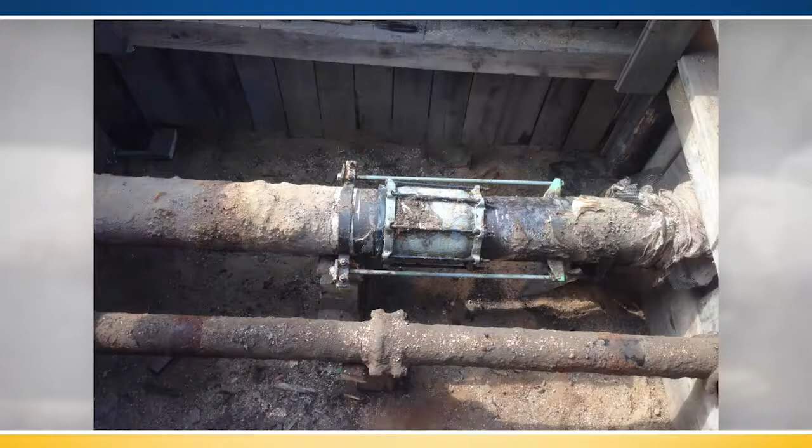Natural gas utilities and their customers benefit from accelerated pipeline replacement programs for aged cast iron and steel pipeline infrastructure. However, conventional replacement methods are very costly, and alternative approaches that provide equivalent or better safety and considerable savings with minimal disruption of traffic infrastructure are highly desirable.

NYSearch Northeast Gas Association partnered with Cornell University experts in gas pipeline infrastructure testing to test lined cast iron pipe segments that have been in service for more than 10 years to ascertain the long-term operating viability of cured-in-place liners.

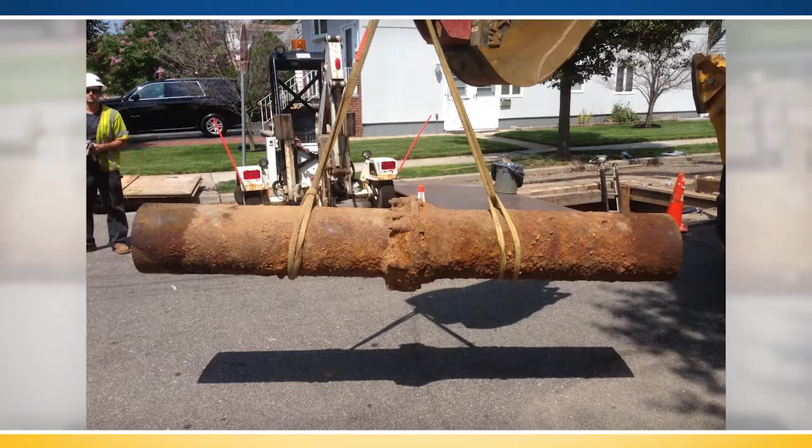Public Service Electric and Gas provided a 6-inch diameter main that was lined with the Starline 2000 product in 1998, and this main was operating at inches of water column. The second segment of pipe came from National Grid. They provided 12-inch diameter cast iron main, which was lined with the Starline 2000 product in 2003. And this particular segment operated off of a 60-pound pressure system.

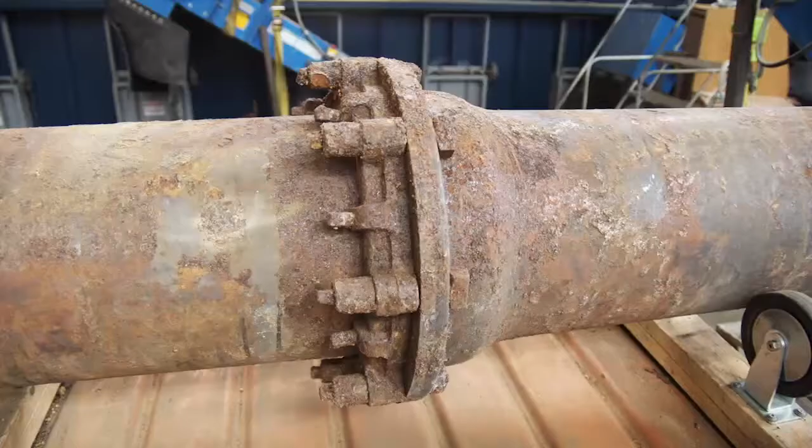We wanted to test a worst-case scenario. So we removed the concrete seal that was above the jute. So this way the joint actually flexed during the cycle testing. The 12-inch joint is a mechanical joint, as you can see here. So this joint will not be able to be weakened prior to its testing and will be tested as it came out of the field.

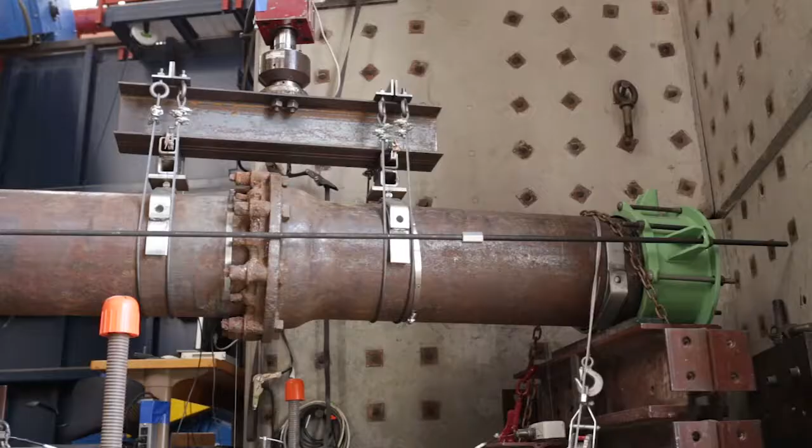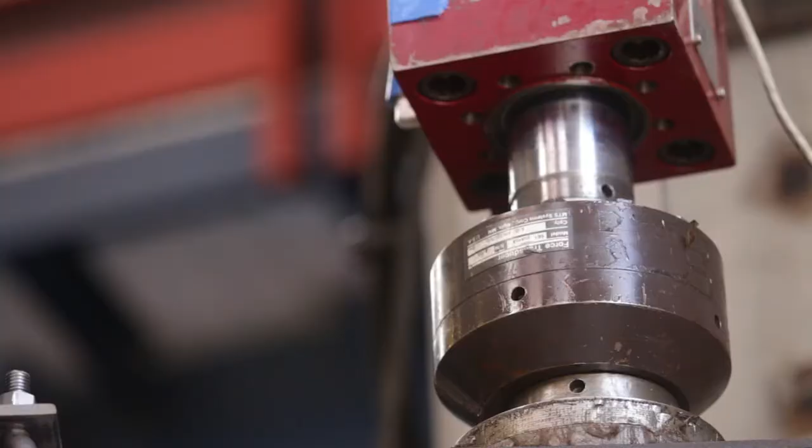This test setup is measuring the deformation resultant from cycle loading of heavy vehicles, street traffic such as buses and trucks. And it's also measuring deformation that a main could experience from an undermine event, such as an excavation around a pipe and then the subsequent backfilling of that excavation.

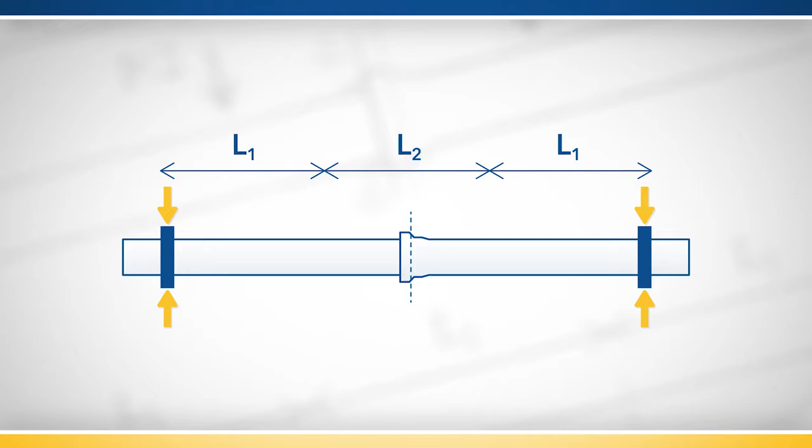This 12-inch section of cast iron main is supported on each end by 2 fixed supports. Centrally located on the joint is a hydraulic press, which applies a downward deformation on the joint. The joint itself has deformation measuring devices located at the 12 o'clock and the 6 o'clock position, and the pipe is maintained at 15 pounds pressure to ensure the pressure boundary remains intact.

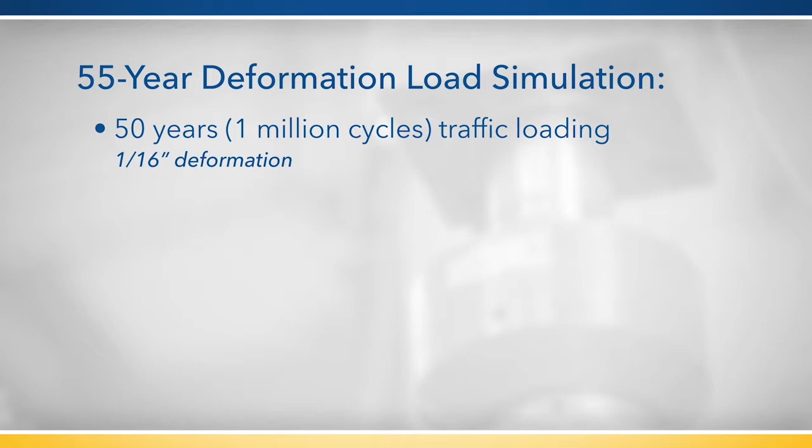The pipe undergoes 55 years worth of cycle loading, which includes 20,000 cycles a year for 50 years of loading that's indicative of heavy truck traffic and buses. Then it will undergo an undermine event, and then it will be tested for 20,000 cycles a year for 5 more years, totaling 1,100,000 cycles of loading.

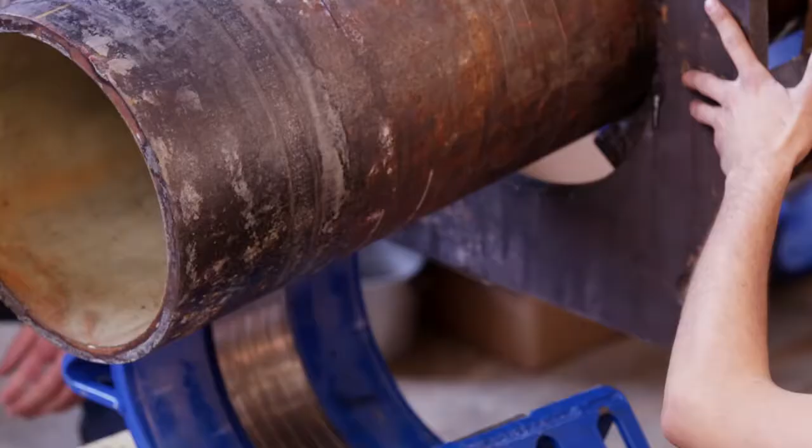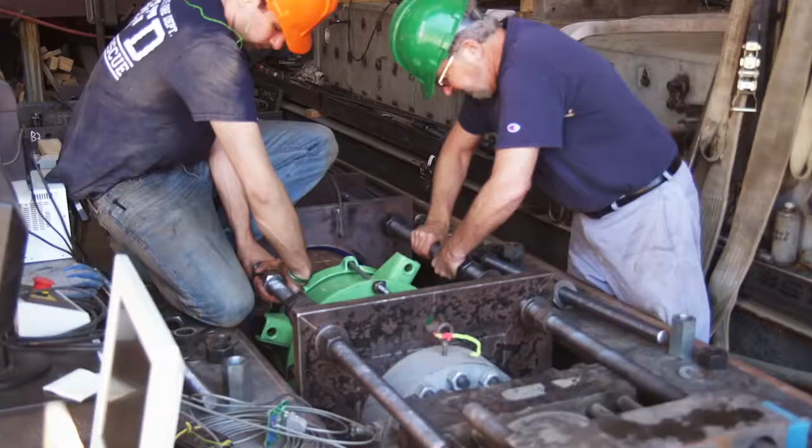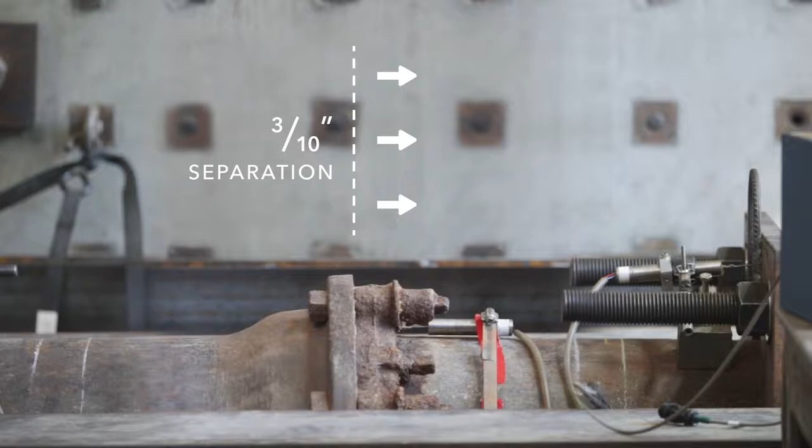The pipe segment in this setup is undergoing thermocyclic testing. A piston on this side is pulling the spigot approximately 3/10 of an inch out of the bell to represent a typical freeze cycle. The main will then be put under compression to return it back to its original position, representing a typical thaw cycle. We use these load cells to measure the tension on the pipe segment, and these instruments around the circumference of the pipe are measuring the separation of the joint.

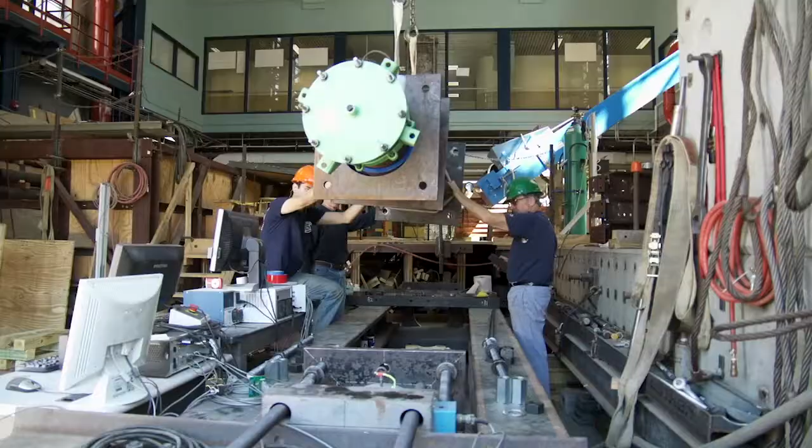After we complete thermal cycle testing in this test setup, the pipe segment will be removed, put back into the deformation setup, will be exposed to an additional 50 years worth of cycle loading, and it will be brought back down to the thermal cycle testing setup for a final 50 years worth of thermal cycle loading. In total, this will simulate over 100 years of field service of a cured-in-place lined pipe.

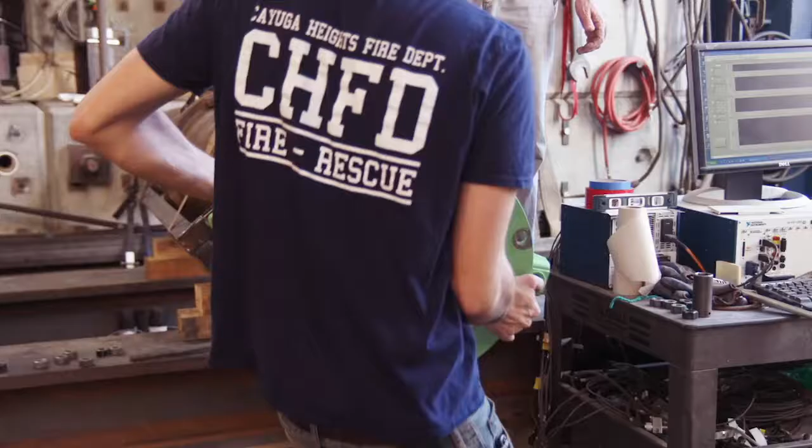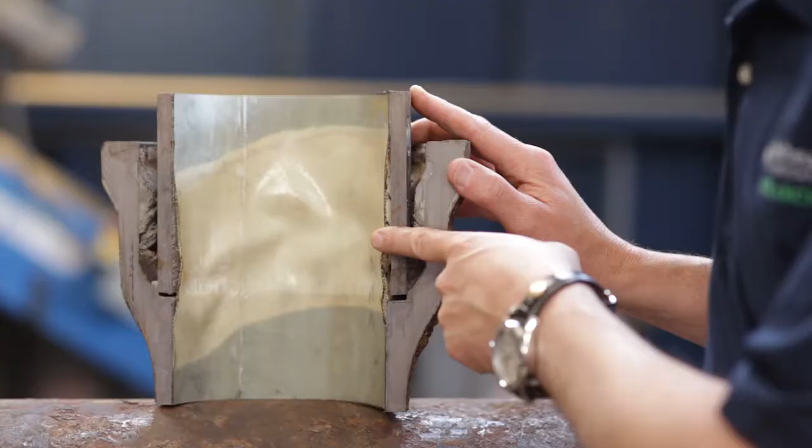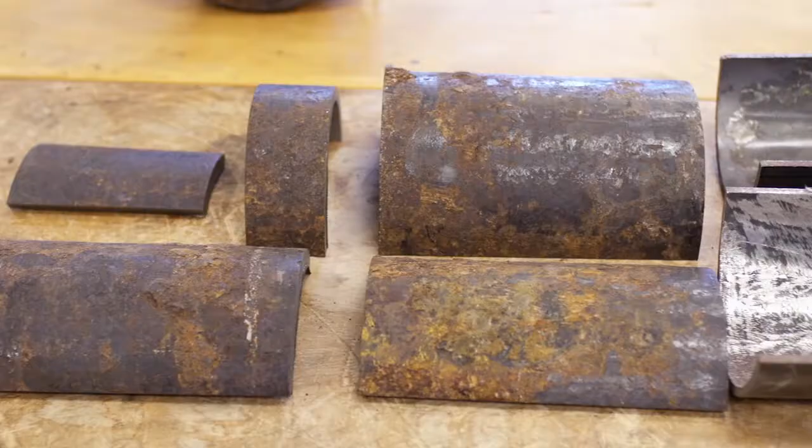After the pipe completes its simulated aging, it'll be observed for debonding of the liner from the host pipe. If we look at this 6-inch pipe sample, we can see there's been some debonding of the liner from the joint area, which would be expected due to the flex during the cycle testing. And then we're going to cut 1-inch wide segments of the lined pipe that has been aged, and then we're going to compare that to the field aged pipe that has not undergone laboratory aging to see if there's any change in the strength of the liner.

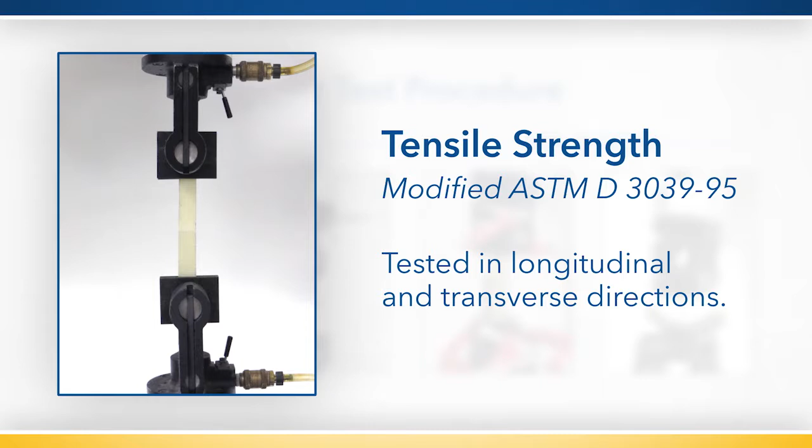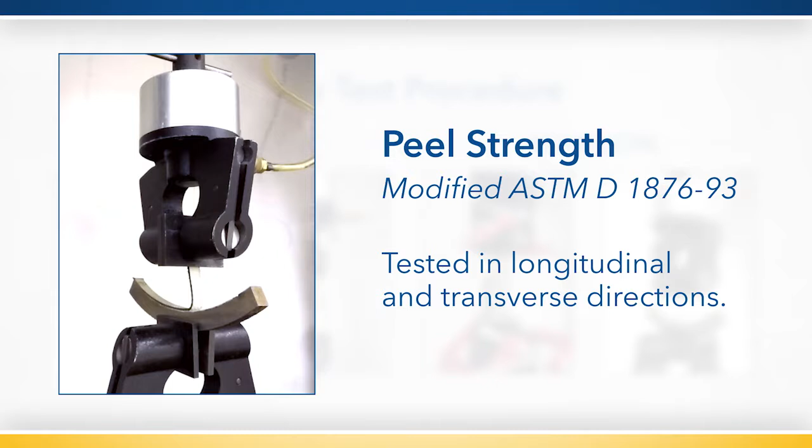I'm very satisfied with the level of performance of testing being done here at Cornell on cured-in-place liners, and I'm looking forward to having conclusive results of how cured-in-place liners perform long-term in the field.

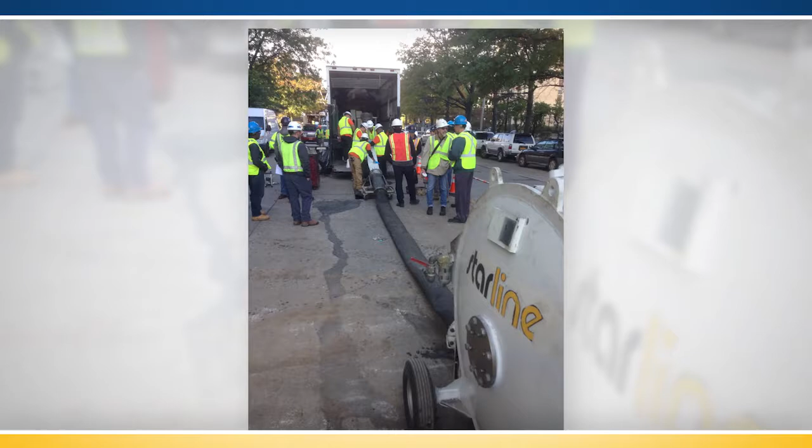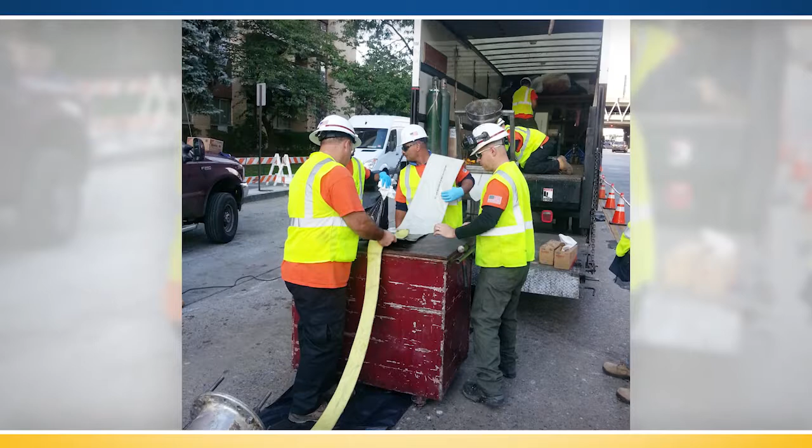NYSearch, in conjunction with Con Edison and Progressive Pipeline Management, recently conducted a cured-in-place liner demonstration in Mount Vernon, New York, utilizing the latest standard operating procedure and quality control practices designed to ensure the highest quality installation. In addition, Con Edison has been installing cured-in-place liners on aged cast iron and steel pipelines for over 2 decades with great success.